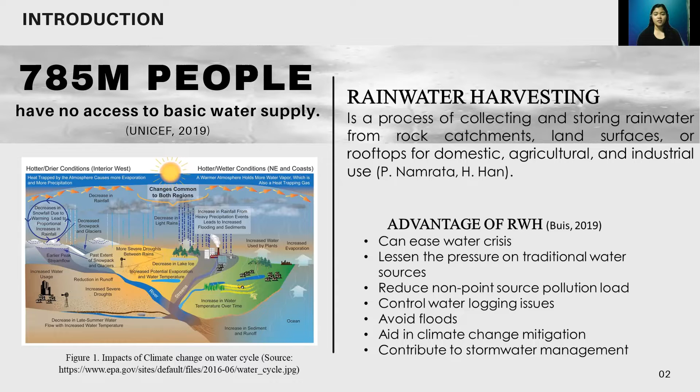In order to address such a problem, rainwater harvesting is implemented. It is a process of collecting and storing rainwater for non-potable purposes. The advantages of a rainwater harvesting system are it can ease water crisis, lessen the pressure on traditional water sources, reduce non-point source pollution load, control waterlogging issues, avoid floods, aid in climate change mitigation, and contribute to stormwater management.

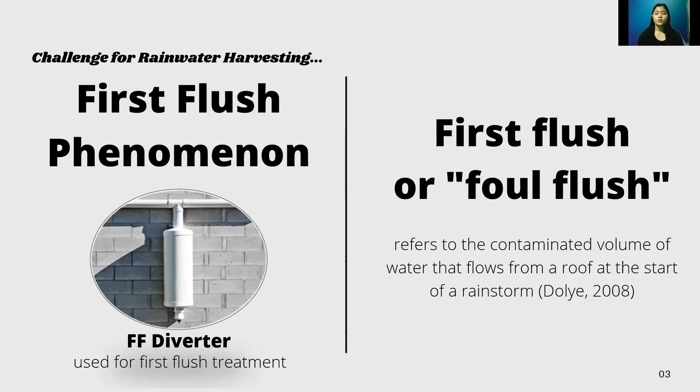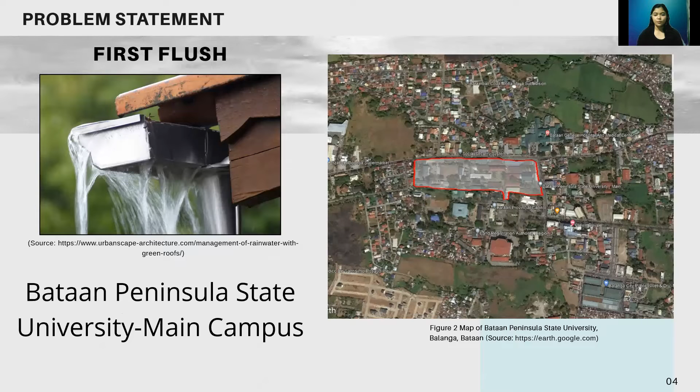The challenge for rainwater harvesting is the first flush phenomenon. The term first flush or foul flush refers to the contaminated volume of water that flows from a roof at the start of a rainstorm. The first flush diverter is necessary for rainwater treatment. Thus, knowing water quality is necessary for us to identify the usage of rainwater and to know the level of treatment that needs to be performed. The study will be conducted in Bataan Peninsula State University main campus located in Balanga Compound, Balanga City, Bataan.

As for the statement of the problem, the study focused on solving the lack of water quality data in BPSU main campus for implementation of rainwater harvesting and treatment. In order to address this problem, the study sought to answer the following questions. What factors are present in the study area affecting the quality of collected first flush? What are the significant effects of rainfall intensity and duration on the quality of collected roof runoff? And how much water should be diverted to collect a less contaminated roof runoff?

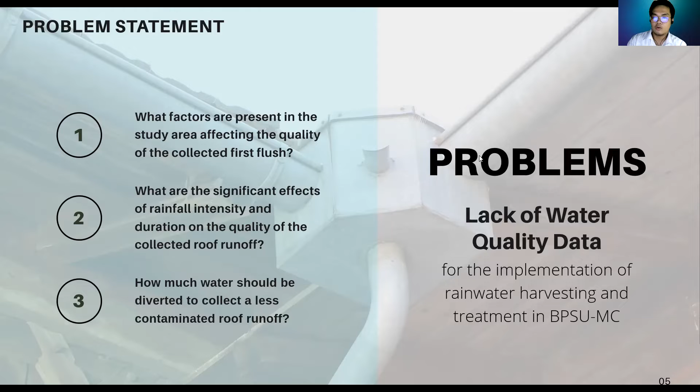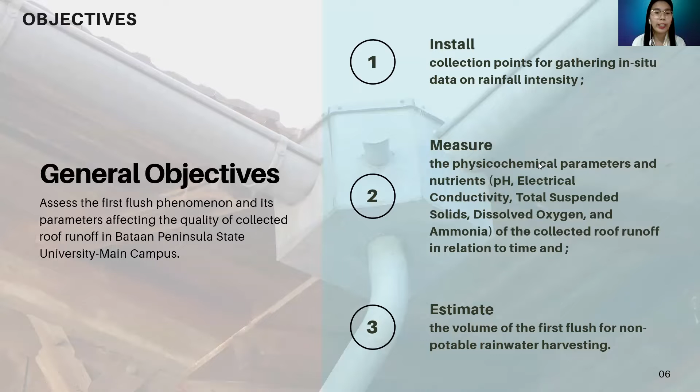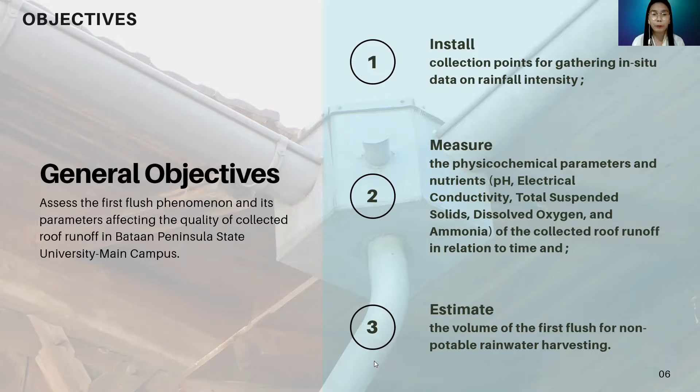As a general objective, the study focuses on assessing the first flush phenomenon and its parameters affecting the quality of collected roof runoff in Bataan Peninsula State University main campus. The specific objectives are: first, install the collection points for gathering in situ data for rainfall intensity. Second, to measure the physicochemical parameters and nutrients. Third, to estimate the volume of first flush for non-potable rainwater harvesting.

As for the significance of this study, by assessing the water quality of collected roof runoff in BPSUMC, the study can provide recommendations for implementation of rainwater harvesting and treatment, which could help in designing a proper rainwater collection system. The study also aims to promote the use of rainwater harvesting, which could help in reducing stormwater runoff in the community. Furthermore, this study is extremely beneficial to water management and projects of BPSUMC, which may help in formulating policies and methods for reducing water consumption.

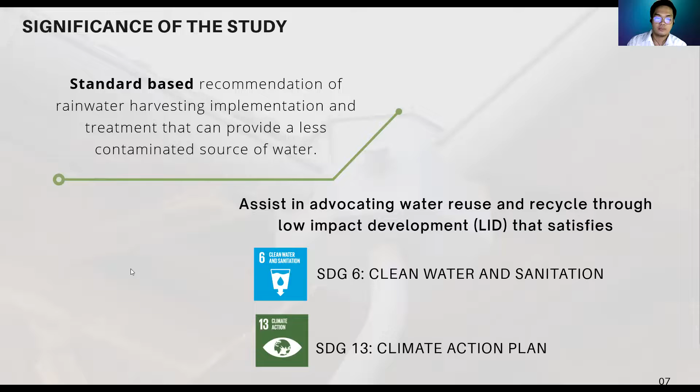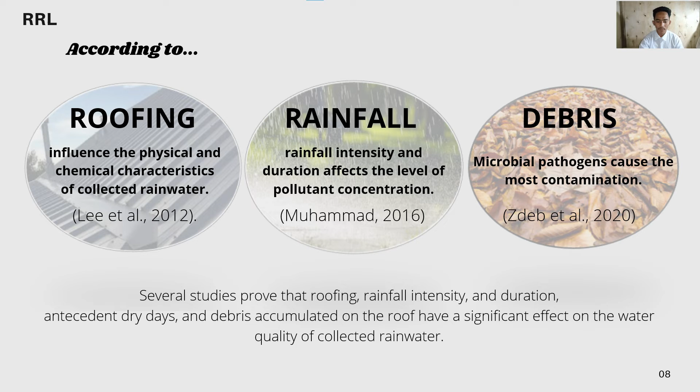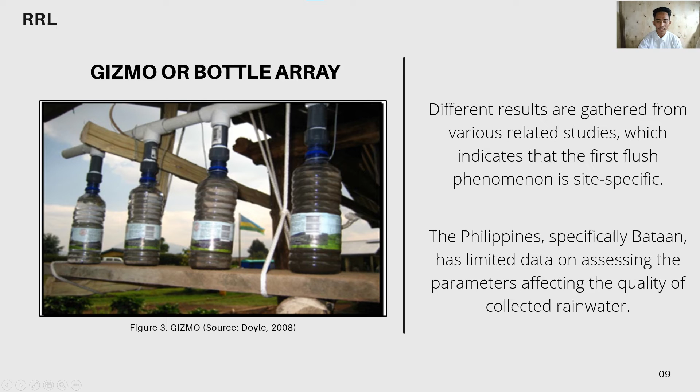As for the theoretical framework, the first flush concept originated in the stormwater and sewer literature, but has also been applied in roof rainwater harvesting. However, Martinson and Thomas 2005 highlight the underlying differences between rainwater harvesting and urban landscapes.

Additionally, assessing the first flush volume is critical. As mentioned earlier, the first flush phenomenon is site-specific, meaning the volume that needs to be diverted depends on the factors present in the area. Factors like roof material, quality, location, rainfall intensity and duration, antecedent dry days, atmospheric pollution, and contaminants.

With that being said, prior related studies propose and recommend the volumes of first flush based on different parameters. According to Yaziz et al. 1989, a volume of 0.33 millimeter is needed to be diverted in order to avoid microbial contamination. Ntale et al. 2003 proposed 0.83 millimeter or the first 10 minutes of rain to be diverted but should be

decreased during rainy season. Martinson and Thomas 2005, which studied the relationship of turbidity, rainfall duration, and water quality, proposed that for each millimeter flushed away, the contaminant load will be halved. As for an average size roof, Cunliffe proposed 20 to 25 liters of rain to be diverted.

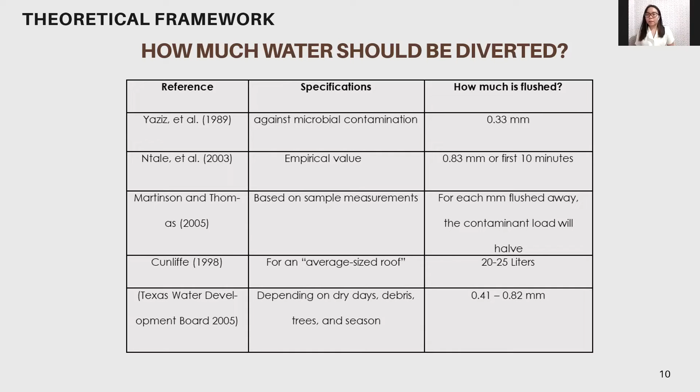But it still depends on the level of pollutant concentration, rainfall duration, and volume of runoff. Due to the lack of water quality data, the first flush treatment in rainwater harvesting of the Bataan Peninsula State University main campus is not addressed. Thus, the study aims to close the data gap and identify the different parameters affecting the quality of collected runoff.

To identify the occurrence of the first flush, examining the quality of collected runoff is needed to determine the factors affecting it, such as physical, chemical, and microbiological parameters present in the roof, and the atmosphere where rain pours down. Rainfall intensity and duration will be analyzed to determine their correlation to the quality and quantity of the first flush. The study will consider the effect of roof area, slope, and roughness.

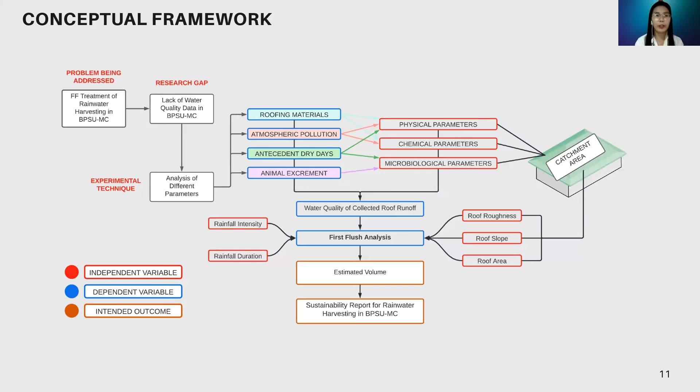As expected, the study will provide an estimated volume of the first flush and an overall assessment of the quality of collected runoff to generate a sustainability report for the implementation and treatment for the rainwater harvesting in BPSU-MC. Various methodologies will be used to collect and analyze data for the study. The methodology used in the study is a combination of descriptive, analytical, experimental, and historical methods.

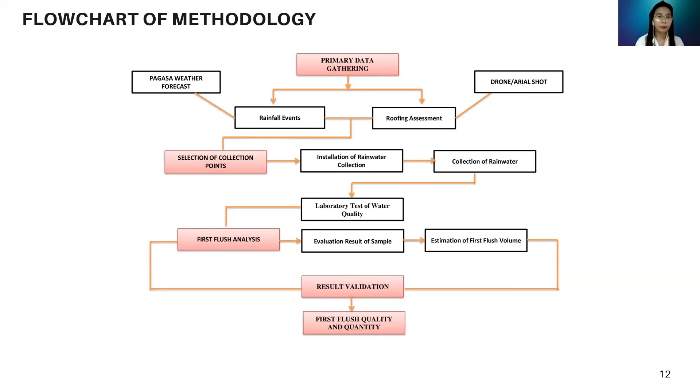Present here is the flowchart of methodology wherein the four major components are the primary data gathering, selection of collection points, first flush analysis, and lastly the result validation. For the first phase of methodology, which is the data gathering, the historical and collected data will be used and considered when assessing roof and rainfall events using reliable or available data. However, a drone camera will be used to evaluate the roof slope and area.

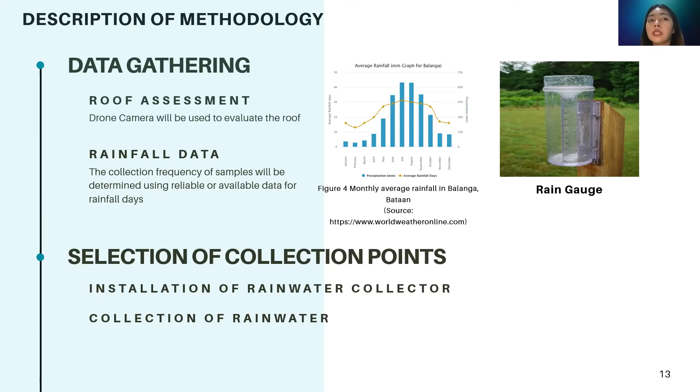For the analysis of the first flush phase, a testing procedure will be done to assess the overall quality of harvested rainwater affected by physical, chemical, and microbiological factors. Rainwater samples collected after storms or rainfall events will be stored in a sample testing container. Then samples will be tested for physicochemical and nutrient content such as pH, electrical conductivity, total suspended solids, dissolved oxygen, and ammonia in the laboratory. Microbiological parameters are suggested to be tested within 24 hours after collection. Once the results are obtained from the laboratory, results will be analyzed and validated.

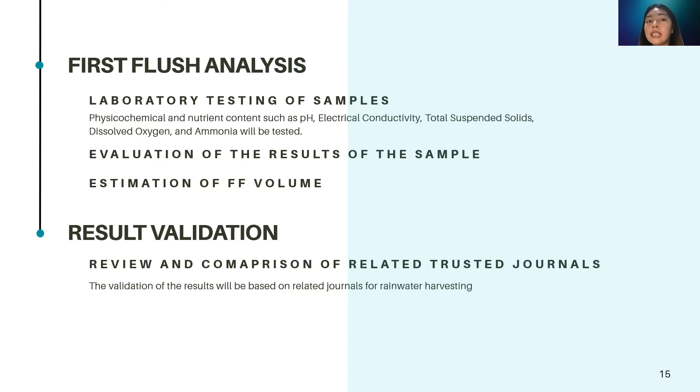And the last phase of our methodology is the validation of results. The validation of results will be based on related journals for rainwater harvesting. The estimated volume of first flush will be validated using journals and the proposed quantity of initial flushing to improve the quality of harvested water. The study will seek to collect and analyze data on the relationship between water quality, water quantity, and rainfall duration.